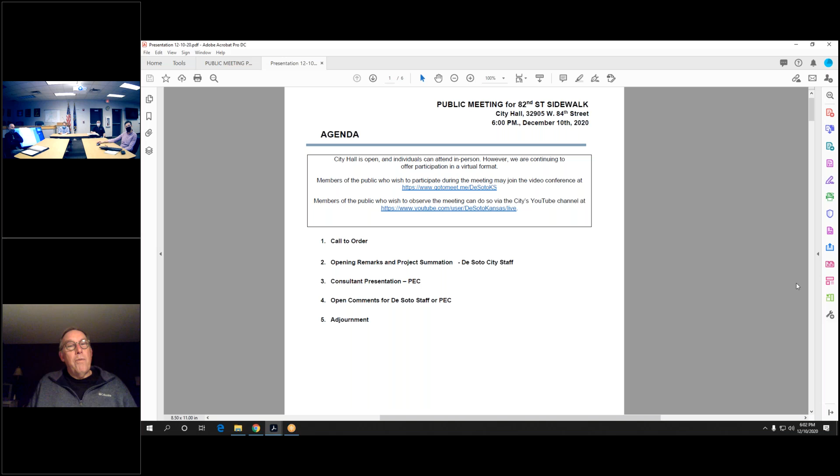Yeah, he's a real nice guy. In fact, I think I told him, I said I think you need to call Mike at City of DeSoto because PEC hasn't done a whole lot in the community, I don't believe. Is this maybe your first project here? No, yeah, way back. Recently we're trying. Yeah, good.

When I first started, it was MKEC. Did you buy MKEC out? When I moved here 30 years ago, it was Mid-Kansas, Kansas, yeah, and the Topeka office was a branch of Mid-Kansas out of Wichita. About a year later, John White and Jim Martin outright purchased it, and they became White Martin. Then they were White Martin for about 5 years, and then both of them kind of developed health problems, and so that's when they sold their company to PEC.

It was during that time somewhere they did a water master plan for us. And actually, Dave was mayor for 12 years, between like 2000 and 2012, and during that time the burning issue was water source. We had our own little water plant and the Sunflower Army Ammunition plant, looking at both of them. Yeah, and it was, gosh, what are we going to do long term, or do we just buy water from Olathe? It was just a gut-wrenching decision.

It just took years, but if you look at those recommendations they did back in '99, we did them all. We decided we're just going to go out here and fix up the Sunflower water plant, and that'll be our source. It's all done now, but it took 20 years. As I was told, there was a lot of water rights out at the Sunflower plant, and there were just some other issues out there. Talk about a circuitous route. That's another one.

Whitney, so if they all know Mike, I own the 2 vacant lots that are on the south side between Shawnee on 82nd Street, Shawnee West to the alley, and I intend to build 3 duplexes there. So I was one of those guys that voted yes. Oh, perfect.

So Dave, I'm showing it on the screen now. It's this property here. There's a couple of parcels there.

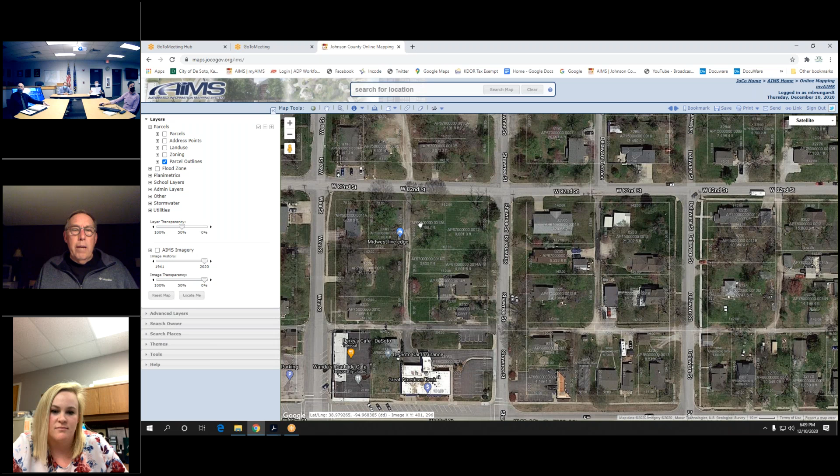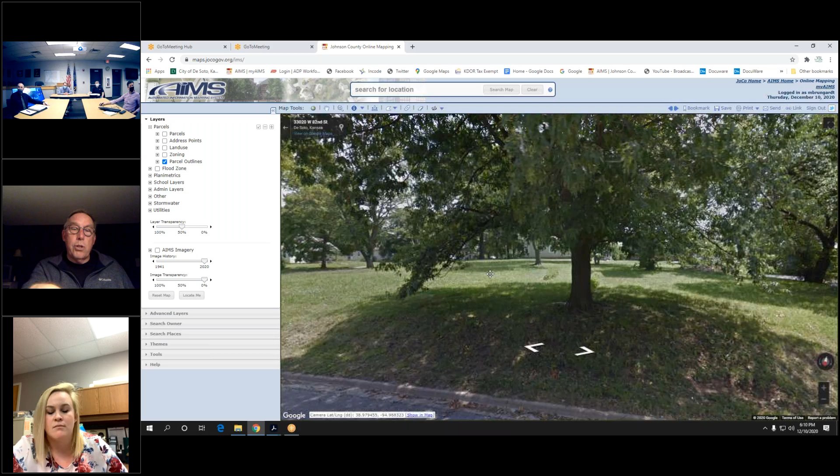At first the tree removal was a little concern, but one of them's dead for sure, and the others are gangly enough that if I'm building new, I should just put in some newer planting materials. Yeah, that's got to go. That's probably the best tree there, but it's still - I think it's a maple, one of those silverleaf maples. They get like that one is for sure. Yeah, they don't grow well at that height.

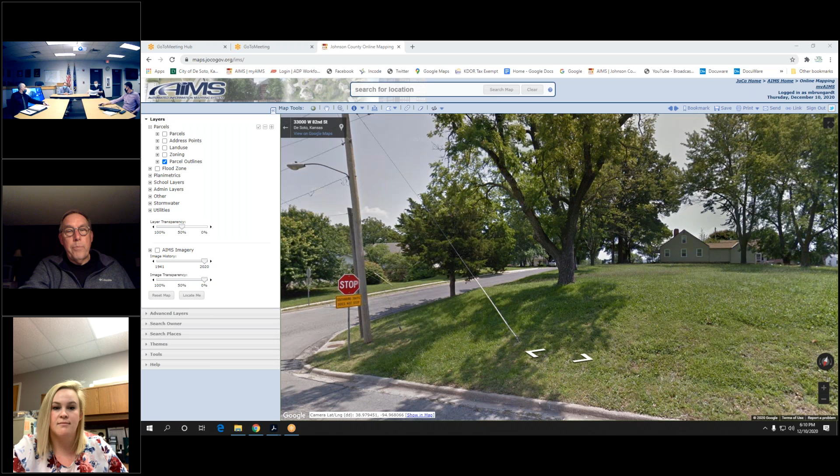Well, good. I think we'd like to turn it over now to Jason to go ahead and give us a block by block, play by play of the concept drawings.

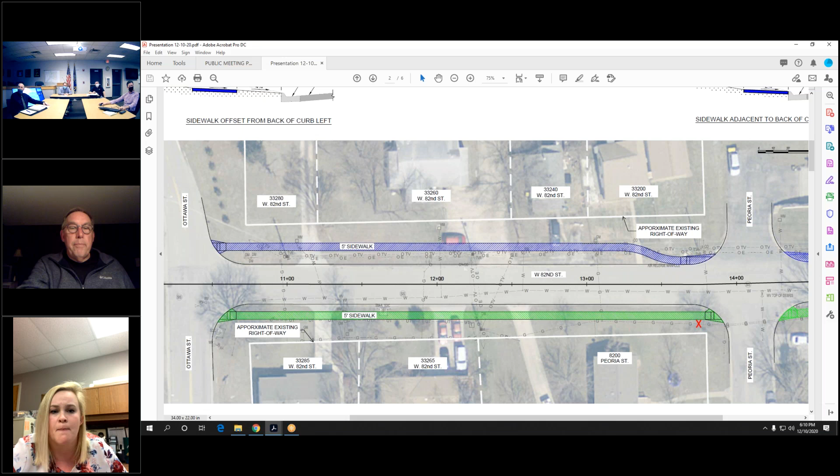And Whitney, these concept drawings were provided to the residents then, is that right? Are they the same ones, Brad, or have they been changed at all? No, they have not. They were the same that we provided earlier on. Then these were provided to both residents and owners of those properties.

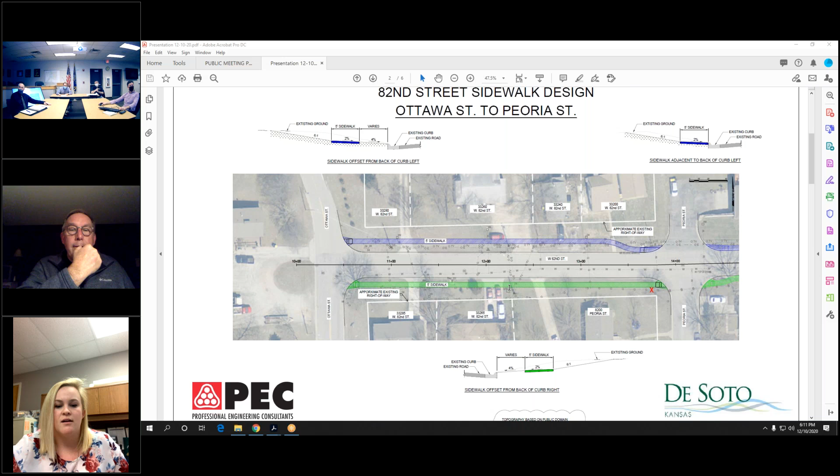But this isn't the enhanced ones, the exhibits. Did we have some enhanced exhibits that came later? If they were these ones that were with the color, then they were the same. I just added the typical sections to the plans at the same time, so everything was kind of on one sheet. I had my contact information down there as well as Brad's contact, and then I removed some of the tiny details just so it didn't get lost in the small images, but yes, they are the same picture.

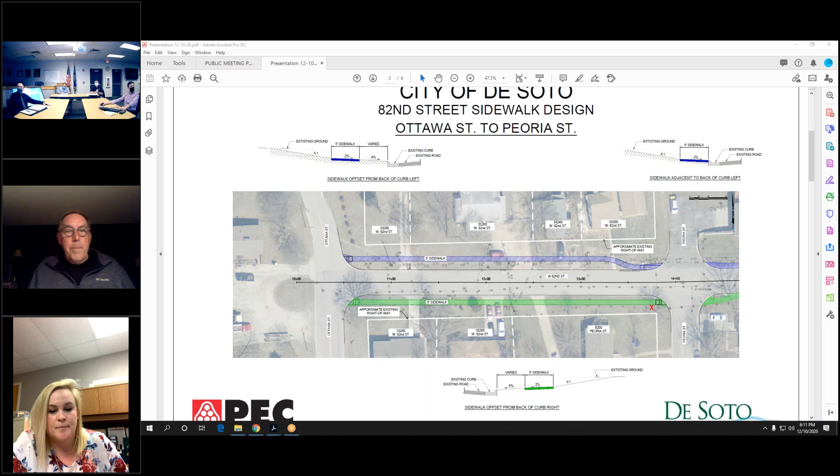I'll just go ahead and start there on the west end at Ottawa Street and move my way east. For this first block, I'll start with the north side. We looked at an offset sidewalk, 5-foot sidewalk, offset from the road a little bit. Some of the challenges we saw with this concept on the north side was the utility poles and the amount of grading that would have to be required behind the sidewalk into the yards.

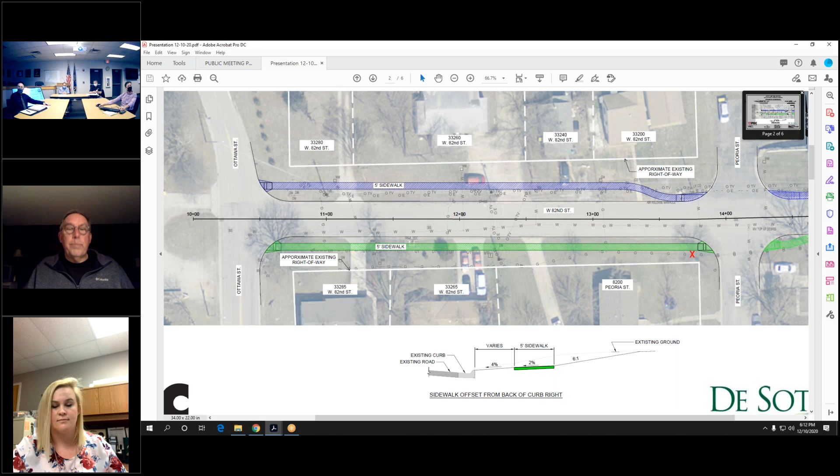That's one of the options there. As we move to the east side, we brought the sidewalk in adjacent to the street to help prevent the amount of grading and the utility poles at that corner as well. On the south side, we again proposed an offset sidewalk from the road, 5 foot wide, and again we would have utility poles. There's a tree on the very eastern end of that block that may or may not have to come out - most likely the construction activities would be within the root zone of that tree, and we can try to prevent that tree removal as we move forward with design. One of the other concerns on the south side is the underground utilities, the gas line in particular, and telephone on this block being underground and may or may not need to be relocated as we proceed with design.

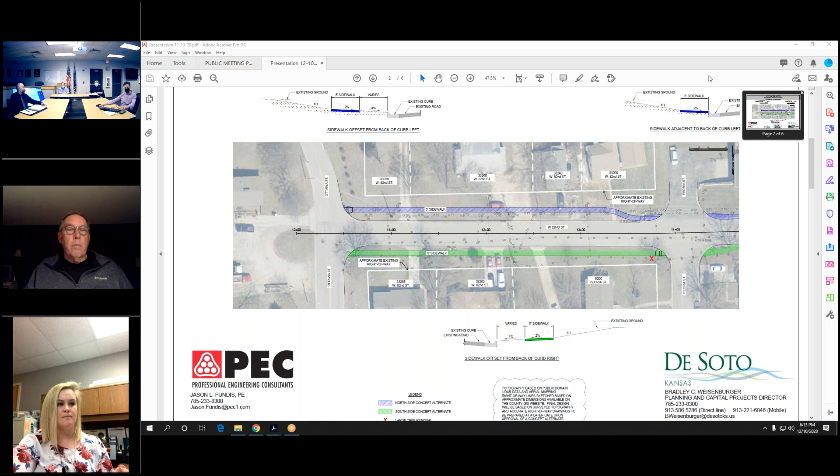Jason, I might point out to anybody listening that so far for this concept study we have done, we were using LiDAR information for contours and topography. We have not yet gone out and done full-blown topography. So when we talk about wall heights and things like that, we're still estimating what some of that might be. Once we've chosen a site, or once you've gotten feedback from the public and taken that to council and a site is chosen, then we'll go out and get final topography. But we have not done that yet - just wanted to point that out. Yes, thank you, Bob. Still in the concept phases.

We'll go ahead and move on to the next block. On this block from Peoria to Wea, on the north side, we proposed to show the sidewalk adjacent to the street due to the utility poles being a little bit further off the street and not having to relocate those necessarily. But another concern would also be how much grading the front yards of these residences would have to have after the sidewalk. Then on the south side, we showed the sidewalk also being adjacent to the street after crossing Peoria. Again, the red X's on the display are possible tree removals due to the construction activities being in that root zone of those trees.

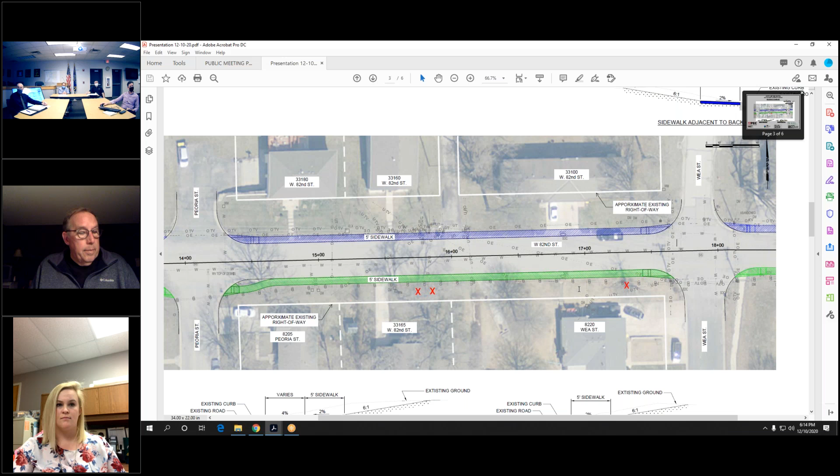There's also possibly a retaining wall in this area, just depending on what that final topography looks like after that is acquired. And then again, the underground utilities, especially in this block, the gas line and the amount of clearance necessary for that with the sidewalk.

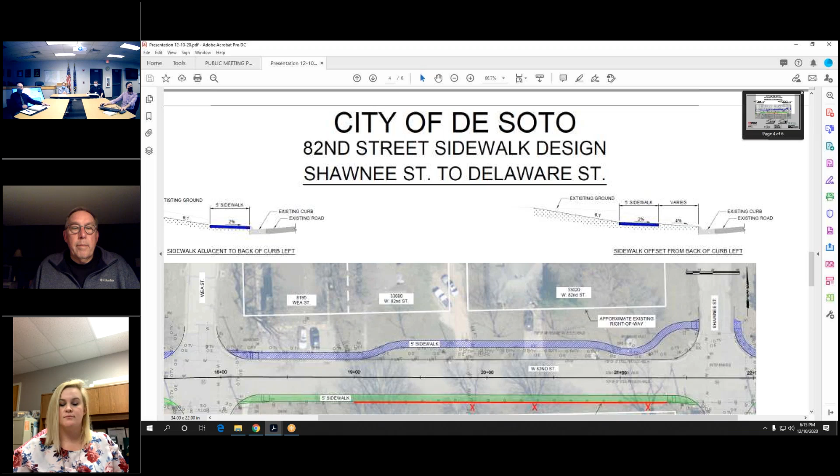Continuing to move east from Wea to Shawnee. On the north side, we started the sidewalk adjacent to the road, then moved it off the road, and curved around some utilities toward the eastern end near Shawnee. The air release vault is there, and we also tried to miss some of the utility poles out there.

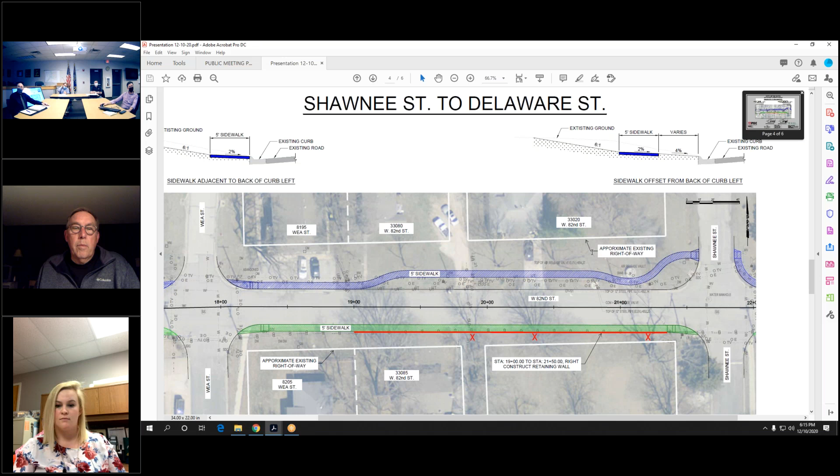One of the challenges here is at the western end with the apartment complex there, and the parking there, and the amount of space to safely move pedestrians along the sidewalk while still allowing parking for that resident on the corner. That was one of the questions we had on the survey - how are you going to handle that sidewalk through the parking area?

The answer typically is you extend the sidewalk. You remove whatever parking or pavement is there and extend the sidewalk. You'd probably thicken that sidewalk up to at least 6 inches, maybe put some reinforcing in there, and the sidewalk would extend on through with the driveway butting up to it. That would be the concept, though it would also be a challenge for pedestrians in future use if that path was chosen for design and construction.

You have that same conflict you see a lot in residential areas, where parking sits in the sidewalk path of a driveway. That'll be true for the entire stretch when crossing drives, and it will limit some of the parking within the residents' driveways.

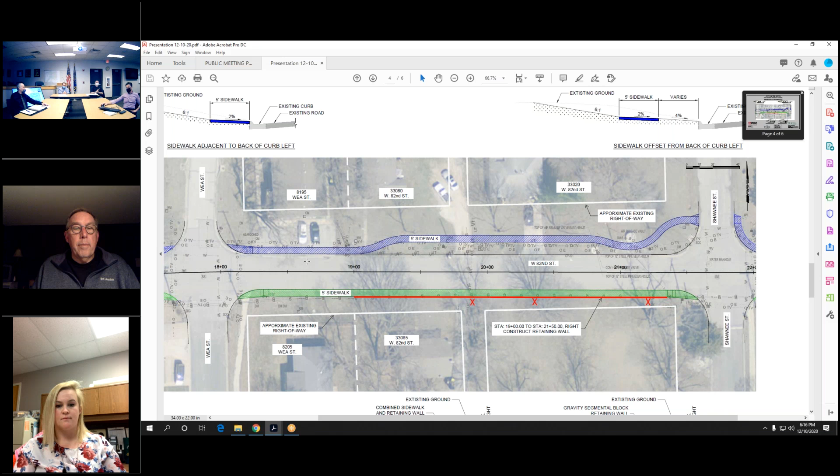On the south side here, from Wea to Shawnee, we showed the sidewalk adjacent to the road, mainly due to the topography of the hill just beyond the road. So here would be a retaining wall, and again we would need tree removal - most likely those trees would have to be removed due to the support and excavation needed to construct a stout retaining wall that would hold up over time.

In this section we would also have utility poles, and again the underground gas line is pretty adjacent to where the sidewalk is proposed.

I will mention that these are still concepts. If the option is to get the sidewalk further off the street, that would obviously be preferred for the safety of pedestrian traffic, bicycles, and vehicle traffic on the road. That's something we can look at - maybe balancing the hillside a bit by moving that sidewalk off the road for safety purposes.

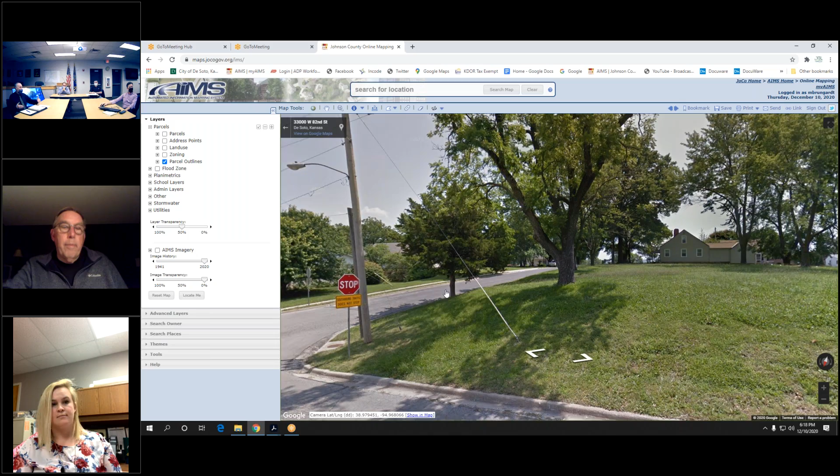One of the other interesting things we've noted, which was true in the previous blocks as well, is that on the preliminary right-of-way drawings it looks like there's sufficient right-of-way. But interestingly, power poles are typically put pretty close to right-of-way lines, and here they look very close in. So an awful lot of power poles are going to be impacted regardless of whether we're on the north side or the south side - we're going to have that issue as well.

On this diagram, I'm curious - this is my property there, where there's a turn. How do you anticipate the ending of the walls, both to the west, which would be the alley by my property, and to the east at Shawnee? How does that wrap around and down going into the alley, and then up or south on Shawnee?

We would most likely turn that 90 degrees of some sort to work with whatever drive is there.

And then that retaining wall would probably transition out as the ground comes up or down, vice versa. It's pretty interesting, that lot.

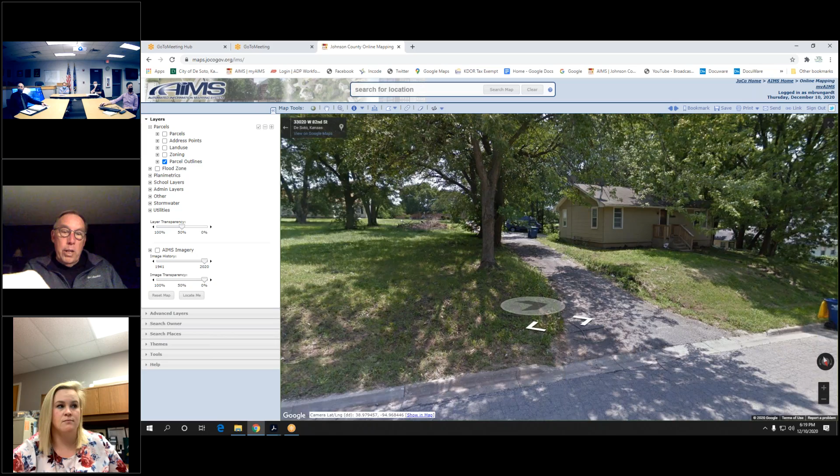So there's the grade difference coming up the alley, which isn't too bad. You could walk it into that hill. And then as you turn on the alley and go south on the eastern boundary, but when you get to Shawnee, look how much grade that drops, almost half the lot. So there are going to be some interesting situations, both in the alley we were just at and here.

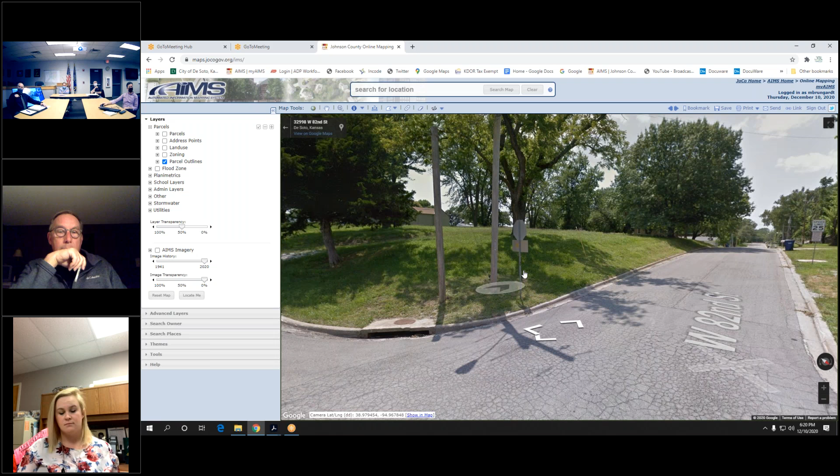Obviously you've got that relatively flat sidewalk that's got to cut in, and so your drive is now going to have a couple of places that are steeper than they were before in order to make that happen.

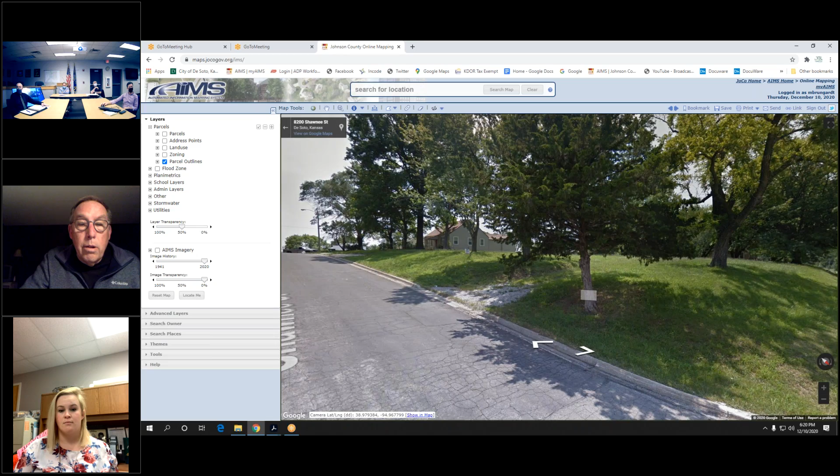Well, I think you see, go up Shawnee there, Mike. There was an old gravel access. There you go, there was an old gravel access that I don't intend to use. I have to come to the site, to the planning commission, and I want to have access off the alley for all 3 duplexes because it just makes more sense with the grades. Like you said, steep driveways, and I don't believe that gravel one works anyway, really.

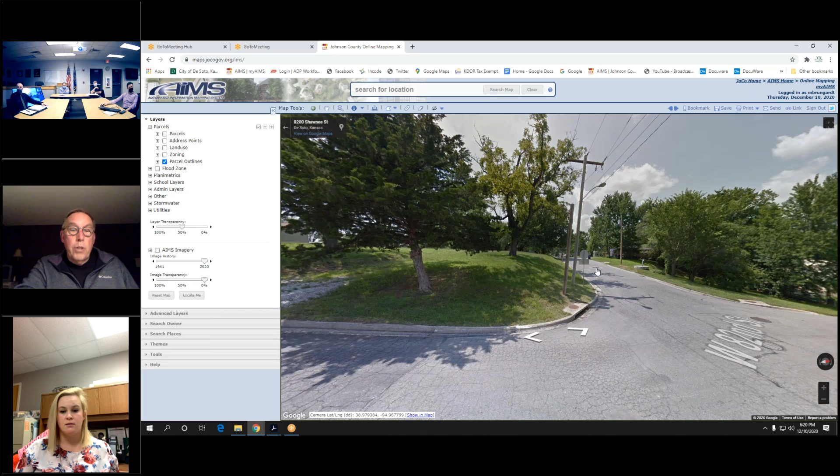I think the important part really is the alley, because now this little drive, that's where the alley is. That's the alley right there, Mike. So even though on this diagram the retaining wall just kind of heads straight along 82nd, obviously this retaining wall is going to have to turn south here and tie into grade here to make that alley work, right?

Actually, if this aerial and the cadastral map are correct, then the alley is offset from the right of way. It might be a little, but we don't worry about those little adjustments. I think a guy might have built a fence close to the bank, Mike, he might be in the alley easement. Yeah, it's kind of a make it work sort of thing.

Well, this is the original plat of the city. This is where the city was started, right here.

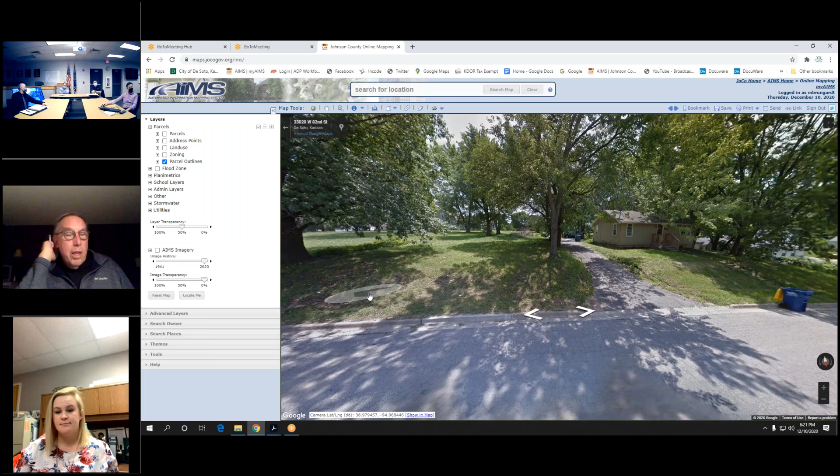Yeah, and Dave, that's one of those options where we're showing that concept being adjacent to the road. However, we may want to shift that sidewalk further off the roadway to kind of balance that hillside, where then you do have a little bit of grade down to the road, up to the sidewalk, and then beyond to help match that drive as well. So that way you don't just have a flat spot and then a really steep drive—you have a little bit more gradual, flat, and then gradual again back up in the drives.

What we are hoping to do is keep all walls 30 inches or lower to avoid the need for a handrail if we can.

This might be another reason, as Jason was just talking about, splitting the difference between the two. So instead of having one 48-inch wall on one side, maybe you could do two 24s, or a 24 and a 30. Oh, okay, I gotcha.

That'll become more evident on the next block, especially on the north-hand side, where the retaining wall is really going to be needed on the north portion of the project if the north side was chosen. So we're hoping to not do any more handrails than we have to by limiting the height of the walls as much as we can. Gotcha, okay, that makes sense.

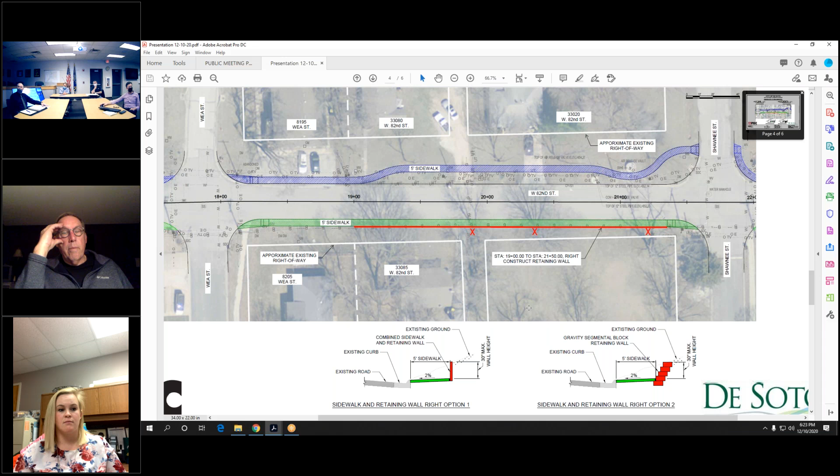We did show 2 different options, whether you have a combined sidewalk retaining wall, which is just a straight vertical retaining wall about the same thickness as the sidewalk, maybe a 6-inch sidewalk and a 6-inch retaining wall thickness. But we also showed an option of doing some sort of a gravity block wall, if that was something the city would want to pursue. We're seeing more of that for more decorative purposes, especially in more residential areas. Yeah, I like that one better.

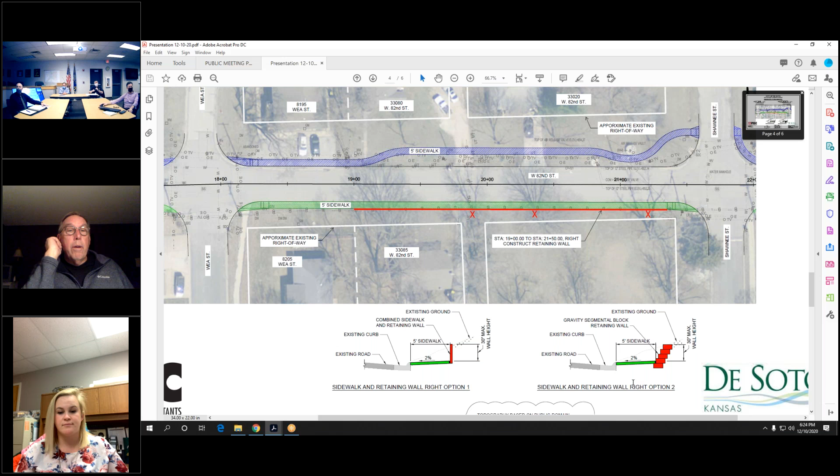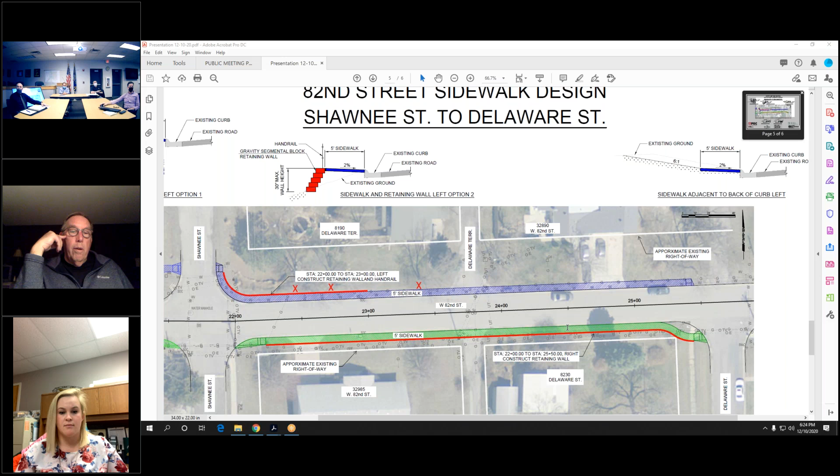I think we can go ahead and move on to the next block, the final block, from Shawnee to Delaware. On the north side here, we had to hold the sidewalk adjacent because of the amount of fall on the north.

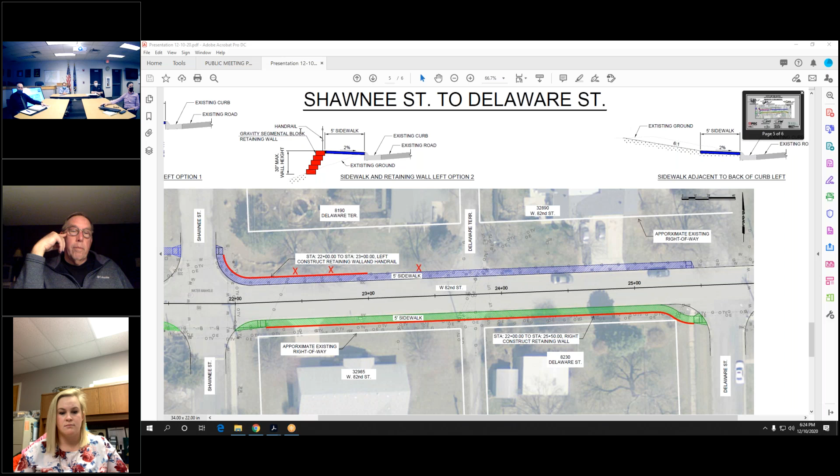This is where the retaining wall would need to be below the sidewalk. And in this case, you would have to have a hand railing, as that max height will exceed the 30-inch maximum, just from eyes on the site myself.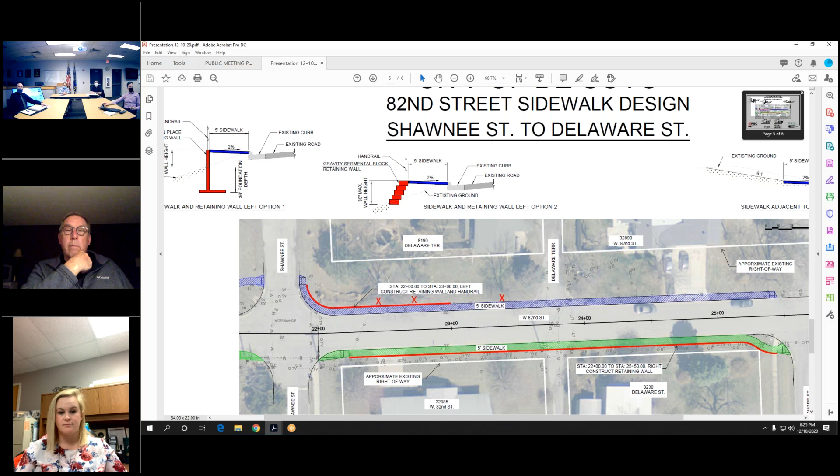But like Bob had mentioned, all of our estimates now are based on just public information, LiDAR topography. Once the site has been chosen, we'll come out with our actual survey crews and get real topography for that time. But that side does really drop off through that half block there.

Yeah, through that half block there. Yeah, that's too far, yeah, just a little bit back there. Okay, yeah, right, so through it there. It becomes quite a bit steep there.

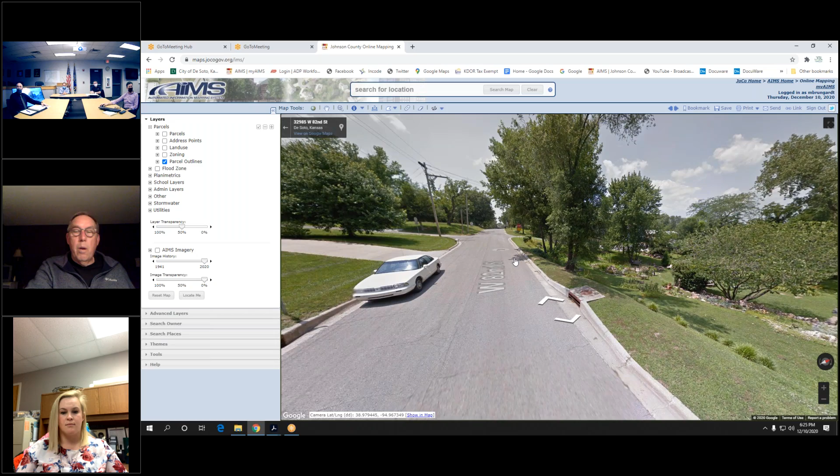This is a good option to show. You can see the inlet just downstream, or just down the road there a little bit, and we would just tie the sidewalk in probably to that inlet top as well.

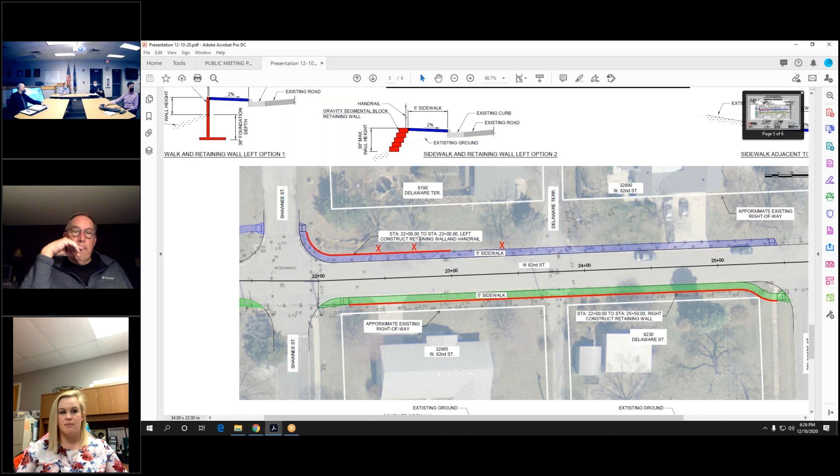Again, tree removal here will become an issue. The amount of grading into the yards will also become an issue on the north side, along with the utility poles. At the end of the project, with the sidewalk already being on the south side east of Delaware, we would have to create some sort of crossing of 82nd Street to meet up with the existing sidewalk there.

Then on the south side, again, we showed the sidewalk adjacent to the street due to the hill that is there existing, and then a retaining wall, similar to what the last block was, and then the same obstacles we're running into with utility poles and the underground gas line on the south side.

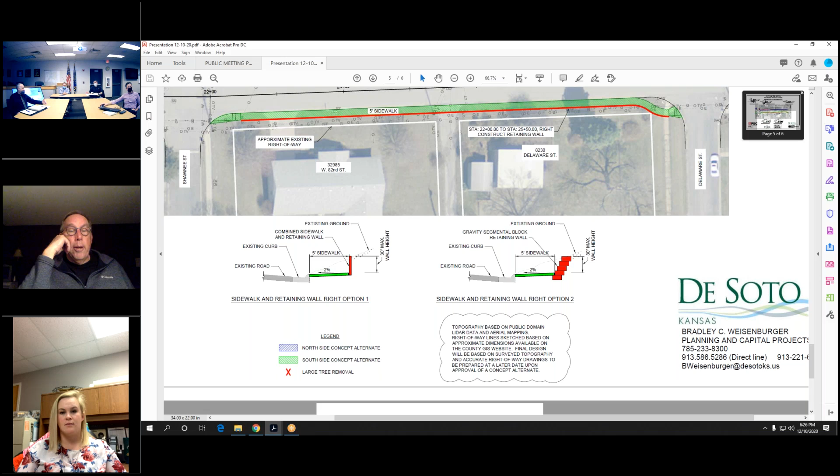One thing we haven't talked about yet, and it could be a design issue—Dave, you brought it up at your place—is at the half blocks with the alleys, whether there are or aren't alleys in each case. Are we definitely going to make accommodations? Are there alleys in each one of those now? Yeah, I believe so, yes. Okay, so we would have to make accommodations just like we talked about earlier.

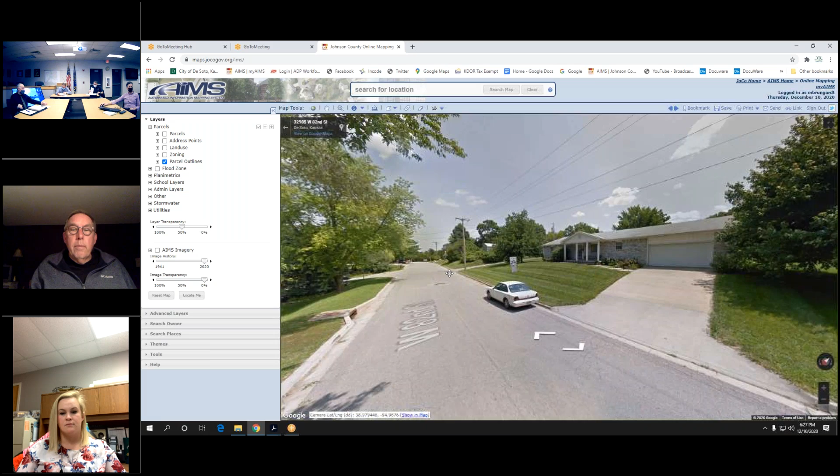And we didn't show that in the concept, we just showed it going straight through. This is, yeah, here's the alley. So we would obviously need, in all likelihood, as we talked about, to turn the retaining walls 90 degrees until we can go back in and catch up.

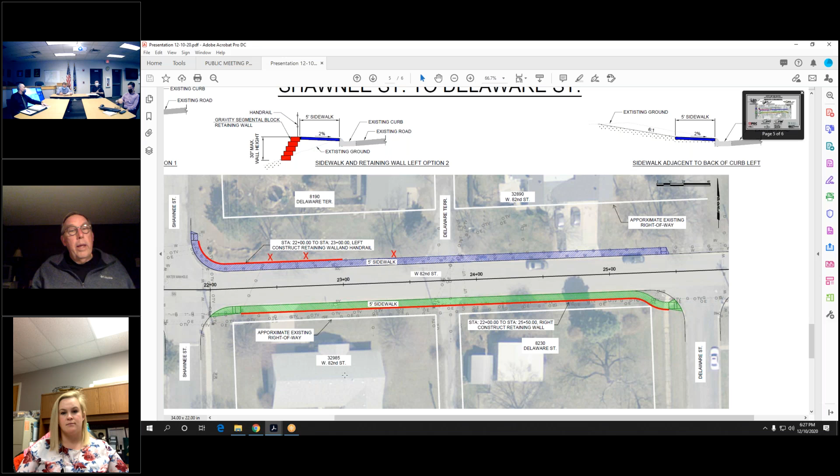But again, with the information we have available at this time, I think even seeing it on site, the opportunity to shift that sidewalk off the road a little bit to balance that slope would probably be the best option—even if it's 2-3 feet off the roadway—to help reduce the amount of retaining wall needed and the amount of grading required behind the sidewalks. Honestly, it's just a little bit safer from a pedestrian standpoint to have a little bit of buffer.

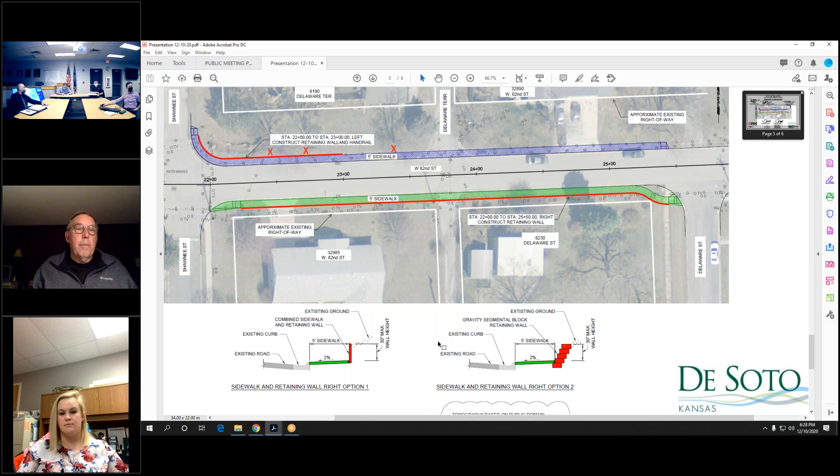Want to move on to costs? Yes.

So we proposed two construction cost estimates for the north side and the south side, breaking out the items that we feel would most likely be needed. On the north side here, we had much less retaining wall than on the south side; however, we do have the handrail and the steel needed for that.

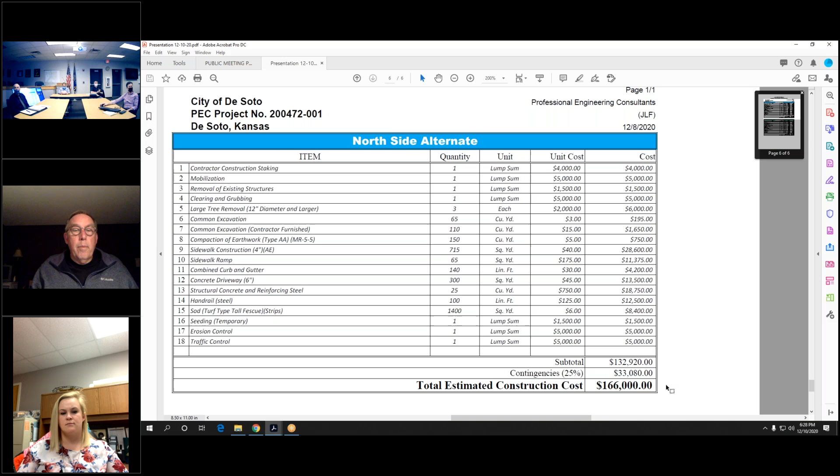And this cost, as you can see, we're estimated at about $166,000 for the north side.

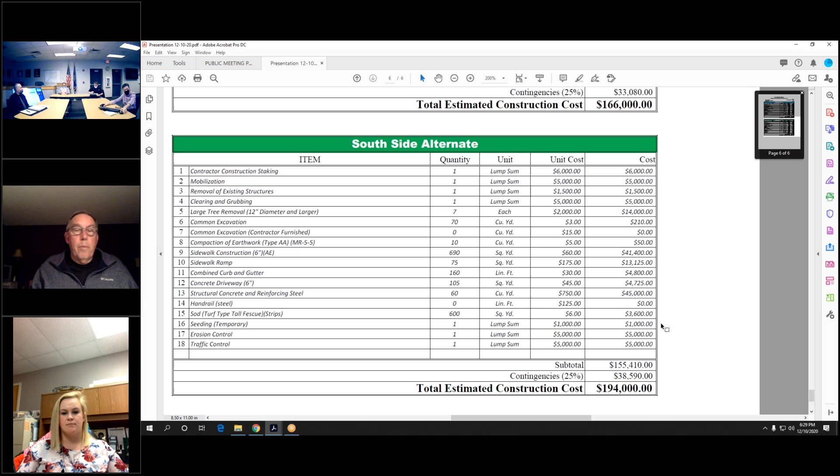On the south side here, we don't have the handrail. However, with the excavation needed for the retaining wall and the additional retaining wall needed here on the south side, I think it's about an additional... I wrote it down, I can't find it—a little over 30,000 difference, not quite 30, yeah.

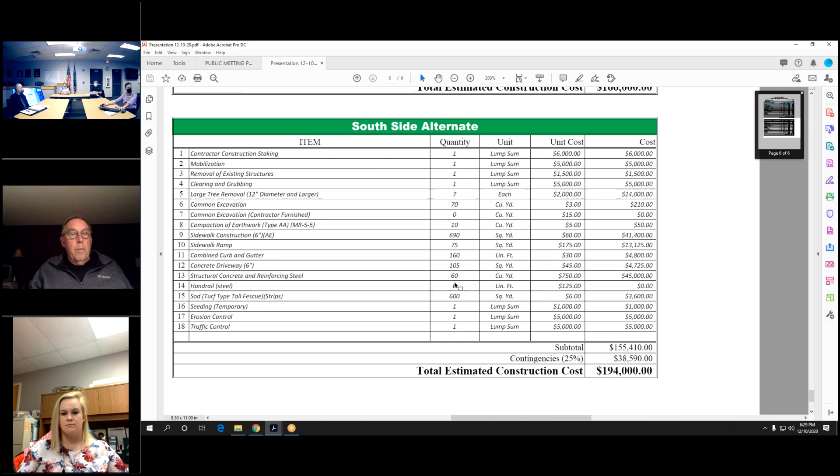Yeah, so with the additional amount of retaining walls on the south side and the thicker sidewalk most likely needed if we're doing a combined sidewalk and retaining wall option, we're about $194,000. And as I mentioned, this is still a concept, and as a site is chosen, we will look for the best option for design and cost savings for the city as well.

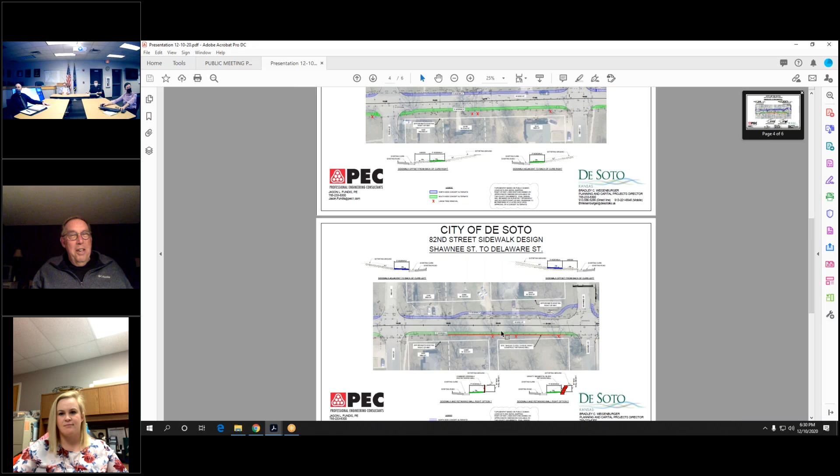So Mike, you think once construction documents come out, we bid it out, maybe late spring, early summer, and get it done in the fall or something? Late spring, maybe early spring for construction documents. That's probably a little optimistic once we talk about the bid advertisement period and getting contracts underway. I would say late spring or early summer is a more realistic expectation, then summertime construction. Yeah, I would agree with that.

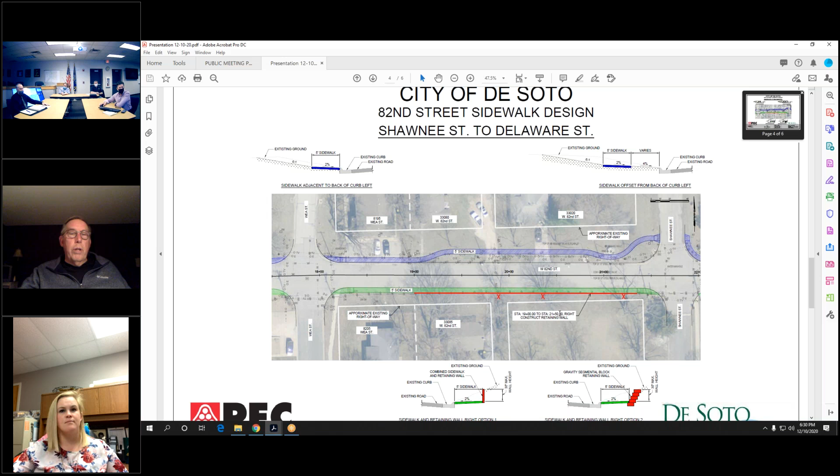Okay, are the utility costs—now I'm getting out of line, but the utility costs in your estimate, the relocation costs? No, we are assuming that those are franchise utilities, unless there are any city water lines or meters to reset. And so far from the information we've seen, we're just thinking it's going to be the power poles and the gas line. But again, when we get topo, we might find more. And everything's in the right of way, so we're covered under the franchise for that.

Okay, however, as soon as we've presented these options and the council selects a side of the road to be on, we are going to want to be in touch with those utility companies to let them know that it's a possibility, because that could delay things. It's an expensive stretch of sidewalk, and I think we're finding out why it's not there already. Not that you can't look and tell, oh, this is going to be a bear to get in there, but yeah, these are the reasons why it hasn't been built yet.

Well, Mike, you're opening Pandora's box, because once you get to Ottawa and you're trying to link up to the Riverfest, that's a nice, interesting project. Mr. Mayor, I'm glad you brought it up, because that's in our CIP for 2022. We're going to be designing that next year. All right, Ottawa Street from 82nd down to Riverfest Park, complete reconstruction, blow up the whole world. New boulevard type sidewalks, both sides, fantastic street lights, streamers and fireworks and confetti. Well, how much? We think that's going to be around $1.5 million.